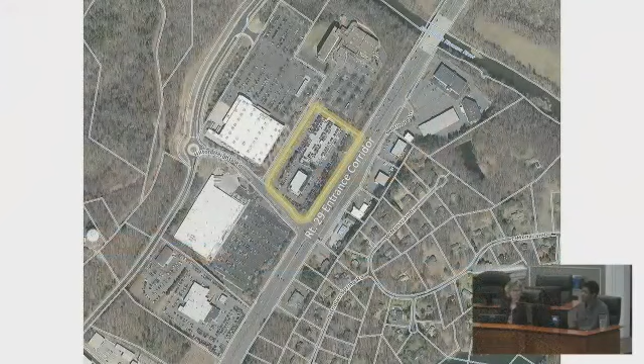The application I'm presenting on today is a preliminary review of the renovation plan submitted for the Flow Chrysler Dodge Jeep Ram building. The site is located along Route 29 near the intersection with Hilton Heights Road. The ARB has approved several applications for the site, including 2 special use permits in 2003, and ARB applications in 2003 and 2005 for the original design of phase 1 and 2 buildings, and in 2013 and 2022 for the renovations to the phase 2 building. A condition in the special use permits is that the design of the phase 2 building shall be compatible with the phase 1 building as determined by the ARB.

To orient you within the site, the phase 1 building is the larger building we're reviewing today, with the structured parking on the right side of the site. The smaller building on the left is the phase 2 building for Subaru.

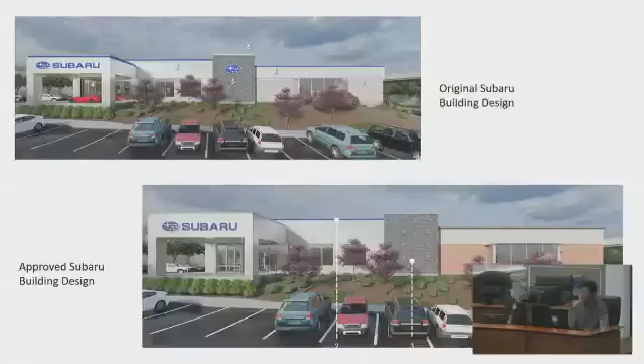The renovation of the Subaru building, approved by the ARB in 2022, added ACM panels, slate-clad towers, and a canopy to elevations visible from Route 29. Painting the remaining brick and EIFS on the east elevation was also proposed, but it was not ultimately approved by the board.

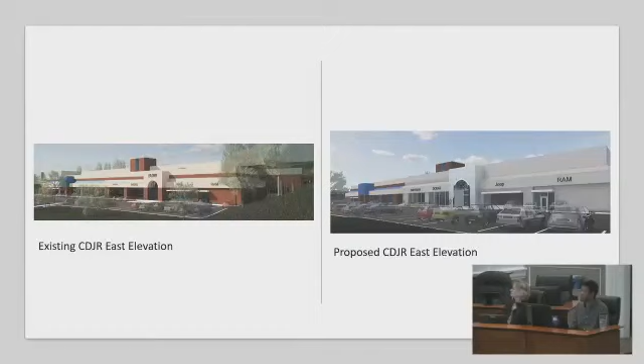The renovation to the CDJR building would cover the existing EIFS-clad entrance element on the east elevation with ACM panels and paint the existing brick and EIFS gray. No changes are proposed to the southern portion of the east elevation that houses a Honda dealership.

The ACM panels introduced in the renovation design, while a modern building material, help reconnect the building with the design of the Subaru building. However, painting the red brick gray removes the connection to the historic architecture and the red brick that remains in the Subaru building and the southern portion of the east elevation of the CDJR building. Staff recommends revising the renovation design to maintain the red brick.

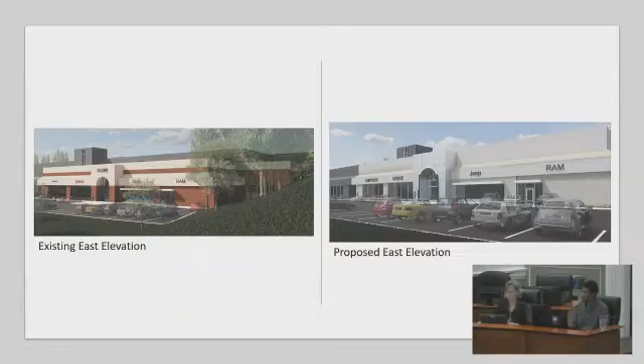Also requested with the submittal was a vehicle display podium with accent lighting. A special use permit is required for outdoor sales, storage, and/or display. The site has an approved SP with a condition that does not permit elevated vehicle displays, as they do not contribute to an orderly and attractive appearance along the entrance corridor. This condition has been consistently applied to similar SP requests in the county. Staff has requested that the display podium be removed from the renderings in the next submittal.

Staff recommends approval of the major amendment with the revisions listed in the staff report. Be happy to try and answer any questions. Thanks a lot.

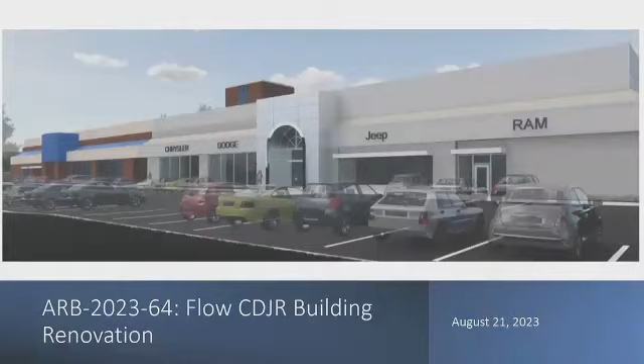Go through and see if any members have questions for staff. Frank, do you have any questions? I don't. Thanks, Chris. Dave, do you have any questions? No questions. Thanks, Chris. I don't have any questions either. So we'll move on to the applicant's presentation.

Thank you, board members, for paying attention to this application. My name is Bruce Wardell. I'm an architect, and I represent Flow Automotive, who are the owners of the dealership.

The ownership of the dealership has recently changed, so there's a whole series of identification and signage that will be coming through as that happens, and that will go its separate path. I spoke with representatives of Flow Automotive this morning, and they would like to withdraw

the component of this application that paints the brick. Through our conversations, we thought it would make sense to leave the brick its current color. That means the application now consists of repainting or refinishing the stucco in the Pelican gray that was submitted, and the new canopy, the new entrance portico, clad in a combination of a satin finish panel, with a small frame around the door in a reflective finish panel, and the refinishing of the storefront to a basic brushed aluminum storefront.

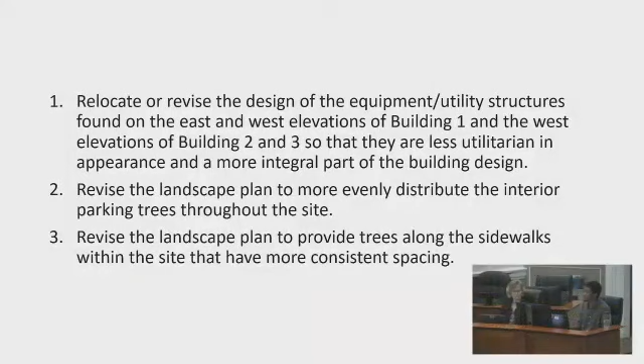The first condition regards the design of the equipment utility structures on the side elevations of buildings 1 through 3. Since the previous review, the material has been revised from a flat hardy panel to a board and batten panel that matches materials used elsewhere on the end elevation. However, this minimal change results in these structures still retaining a utilitarian appearance.

Additionally, since the previous board review, a utility structure has been added to the north elevation of building 4. Another change to note since the board reviewed the application is the addition of a standalone structure east of building 4. The building uses materials found in the apartment buildings, but is a maintenance building set very close to the entrance corridor.

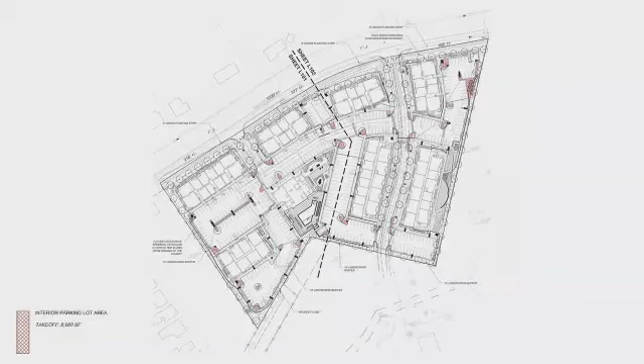Regarding the landscape plan, along the perimeters of the site, large shade trees are now shown. However, the spacing in the interior parking lot trees remains inconsistent, and some of the trees do not meet the required caliper size. Staff is requesting the board's guidance on these remaining conditions of approval. I'd be happy to answer any questions.

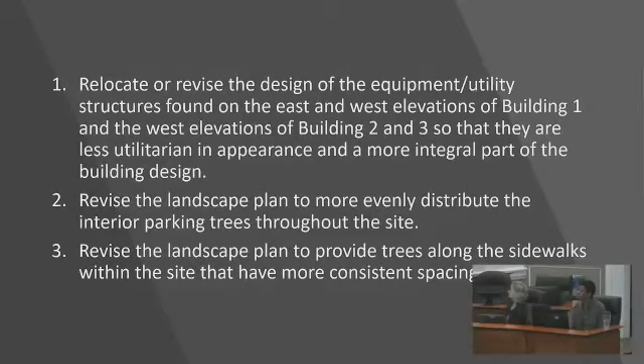All right, thanks a lot. Tara, do you have any questions? No, not right now. All right, Frank Hancock.

Thanks, Chris. The new, I guess, maintenance shed building - was that one of the questions, like removing that or relocating it on the site? Or was that just something you noted that's new, getting the board's thought on something with a kind of similar theme, the utility structure in close proximity to the entrance corridor. Okay, and that one has popped up since we last reviewed and approved. Okay.

Just curious, did you ask the applicant? Have you had conversations with the applicant about relocating this and the other structures, and they haven't been able to, or? There are site constraints and layout constraints related to how we've already laid out the apartment buildings, relating to relocating those structures.

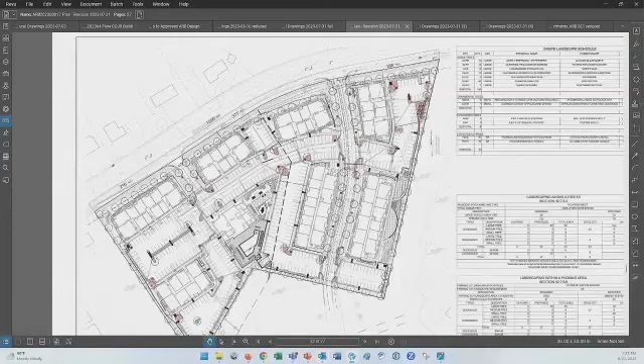Gotcha. And then maybe if we could go back to the landscape plan comment, the larger one. Was it the tree distribution on the interior streets or parking lot - is that the question? It's interior parking lot and pedestrian. I guess if you want to go back to the original presentation that just had the bullet points. Oh yeah, let's look at that one. I just want to make sure I understand that.

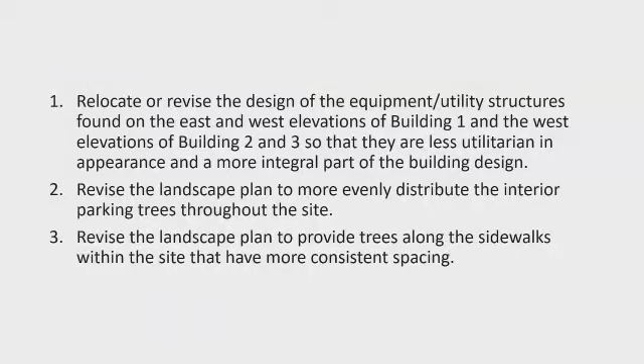Number 2, is it an issue with utilities and the inconsistent spacing? Yeah, utilities and light poles are in a lot of the places they've noted that don't have interior trees, but they noted it could be a location for interior trees if light poles and utilities are kind of throughout the site. Okay.

I apologize, I should have looked for this, it just popped into my head. Did the applicant meet the numbers requirement? So it's just more of a distribution issue, and there's obvious holes. I'd say that's probably 7 of the ones being counted for interior trees, so like 29 or 30 are consistent, but could have more even distribution, but these in particular are also smaller caliper trees and just kind of gathered in that one location.

You kind of really notice the lack of distribution towards the middle of the site. Yeah, I'm definitely sympathetic to applicants when you're trying to cram all this stuff with these buildings and utilities. A lot of the underlying conditions probably aren't even showing up here, or they're in the background affecting those decisions. Usually landscaping requirements are pretty easy to attain for an applicant, but it seems they're up against some issues like that - that's helpful. Thank you, I just wanted to understand that better.

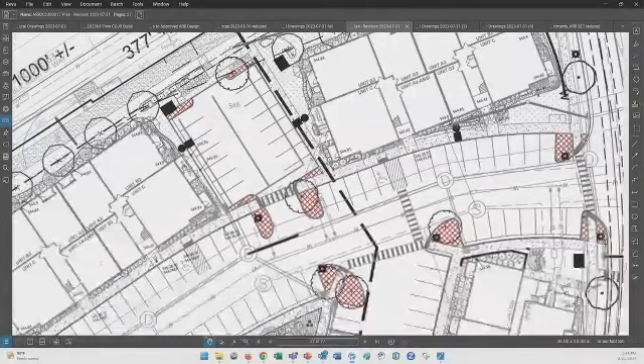Building 4 is none, and on this elevation, this end. Other electrical and water and storage on... and then there is one kind of there, that one I guess is just... one on each end of that building. Which building? The building we just looked at, where you have your... the other end of that building, is that it? Looks like storage on the opposite end, so I imagine a similar form.

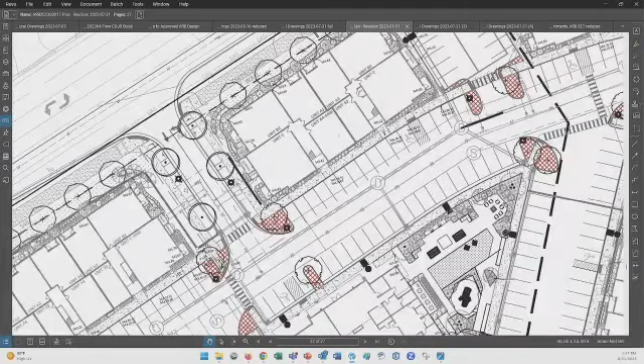Chris, do you mind zooming in on those again that are on the ends that are most visible at the entrances? So, left to right, this one would be the shed form you saw in one of the renderings. This elevation does not have... it does have a form. Next one would be facing inward to the parking lot along the entrance corridor, similar form facing inward to the parking lot. Two opposite each other, storage, water storage it seems, some of them uses vary as alluded to by the applicant. One last one, along the perimeter of the property.

I guess a question for the applicant is: is there room to provide any planting at the location that's on screen right now that would reduce its visibility from the EC? Like a shrub even.

I would have to defer to civil and landscape on what our planting options would be within that space. But tossing out an idea, it seems like the ones on the sides at the entrance roads, if there were a well-placed shrub or a few, coupled with painting the doors to match the siding so they become very muted, I think would solve that. The one at the end facing the EC at the northern building seems a little more challenging in terms of planting it out.

So that's open. The other question related to that one at the north is there appears to be an areaway at that end of the building. Would it be possible to locate the service entrances so they're off of the areaway, that grade change? Does that move to the lower level so it's less visible? Right now it's up—looks to be 5 or 6 feet up.

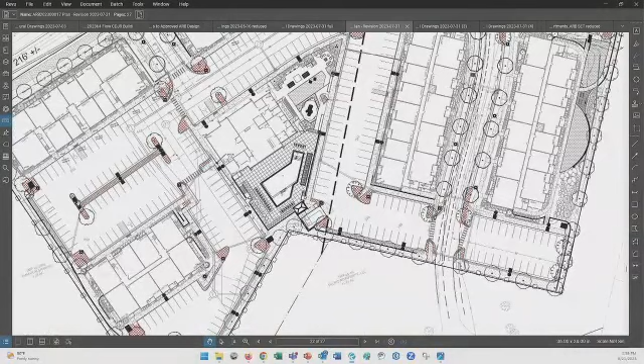What's that portion with the parking lot that has like a roundabout, that goes around on the left-hand side? There's a red portion marked in between 2 double-loaded parking lots on the left-hand side of this drawing. There's some sort of utility running under that portion. Oh, here, yeah, I believe so, because I think the previous landscape plan showed trees there.

Scroll down, I get up so we can see the top. Or is it right of way? Shared use path, property line - do you know what the dash line is at the top, just above that first building? The street trees appear to be set back and we're assuming that's an easement, a utility easement.

That dash line here - what, is that a right of way? A wide right of way right there. Yeah, it's a lot of right of way and a whole lot of underground utilities, plus an overhead utility line. I mean, it's just clustered, chock full with so much utilities right there.

I mean, it's something we kind of talked about at the beginning of the first ARB meeting, but we've been working with Margaret and Chris before we even submitted the rezoning application, just working on the placement of these buildings, knowing that that was going to be a huge concern. We worked it out to where we'd have at least 10 feet of tree planting area in front of each of these buildings with all the utilities and the buffer. None of the utilities we're putting up there, except for some yard drains, because it's sloping down to our buildings in that location, as opposed to putting retaining walls and taking away from extra landscaping. So, gotcha, it's...

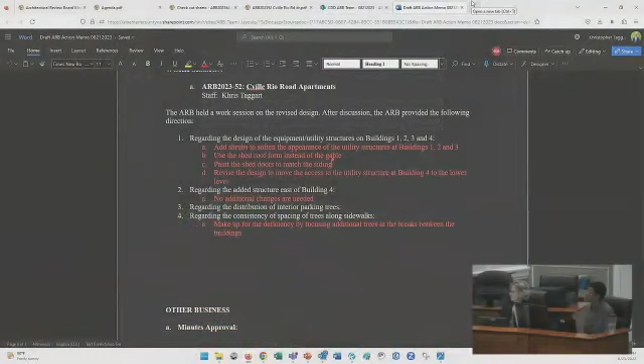Items 3 and 4 regarding the interior parking trees and the sidewalk trees, make up for the deficiency by focusing additional trees in the breaks between the buildings. That's my thought. Open to other ideas. Works for me. And that applies to 3 and 4. Yes. And maybe we can note additional trees in the breaks between buildings, and also increasing the caliper of the trees that are present, similar to how the applicant proposed.

I guess this might have been covered in increasing the caliper of the trees. Was the board okay with the ornamentals, particularly if they had more consistent spacing and not grouped off into one location? Acknowledging there are utilities and lighting throughout the site, or if ornamentals are grouped, would large shade trees grouped that close together really lend itself to plant health?